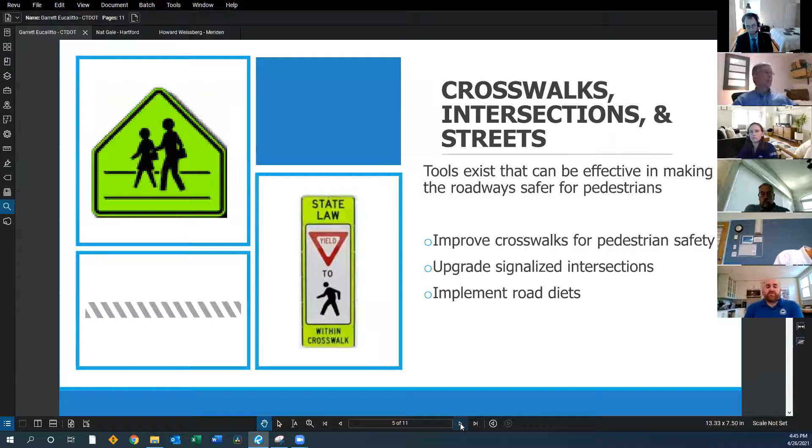It's really important for us to continue to do the outreach that we're doing through the Watch for Me CT campaign. We partner with the Connecticut Children's Medical Center to stand up this program. Connecticut's Highway Safety Office, run by Joe Cristalli in our Policy and Planning Bureau, is the lead on this initiative. Next slide.

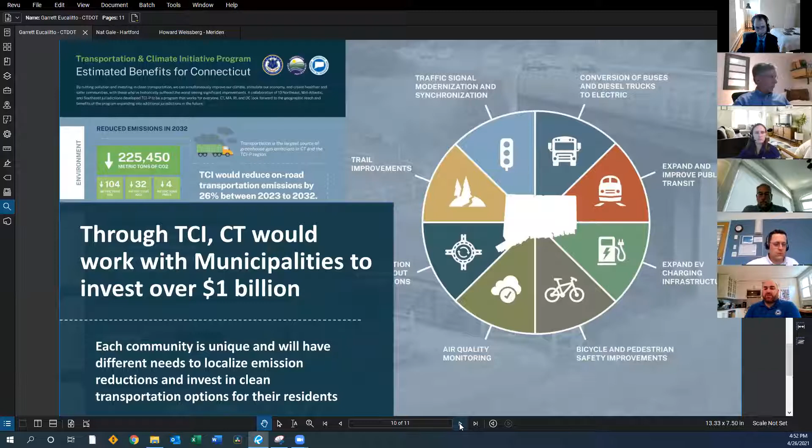So one of those pieces is through the Transportation and Climate Initiative. This program would reduce carbon emissions in the transportation sector by 26% over the next 10 years by auctioning off allowances for those carbon credits. And through the auction proceeds, Connecticut would generate $1 billion over a 10-year period to reinvest back into clean transportation. And this is a little piece of what I try to talk about to the public about how those proceeds could be invested. Talking about roundabouts and traffic signal modernization, bike and ped safety improvements. Each community is going to be different in what their needs are to help reduce emissions. And a lot of that is going to be on those that can help reduce idling, improve traffic flow, make it safer to walk and bike in their communities. Not to mention the opportunities for public transit as well.

And I think that should be it. So that is my presentation. Happy to take questions or wait till the end.

Thanks, Garrett. Yeah, this is Rich. And great presentation. A lot of interesting initiatives moving forward. A few things came to mind when you were talking. I heard about lowering speed limits in certain zones, I guess. So I'm wondering about enforcement, because as everybody knows, speed limits are not always followed, and you really need the enforcement element to make those as powerful as they can be.

Was there any discussion about how do we enforce the speed limits, especially if we're going to move to lower them further than where they are? There were, you know, it's a balance, I think, for a lot of the public policy folks, where we're having a reckoning in our country right now about the use of police force in traffic stops.

And there's discussions at the legislature about maybe moving some of the current primary offenses down to secondary offenses. So you can't be pulled over for covering your license plate as a primary offense, things like that. But speeding is something that continues to be, you need to have some form of enforcement.

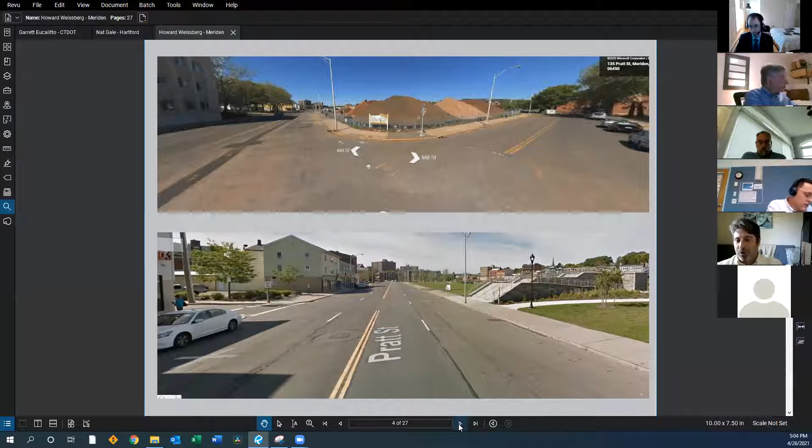So next slide. This is the redesigned Meriden Pratt Street Gateway. You can see that we have realigned the intersection of, it's technically Camp Street. We're actually in the process of renaming it Pratt the whole way through. But as you get closer, you can see that there's a landscaped median and you cannot go straight through. As we get to the intersection that was offset by 15 feet, you can now see that it is actually aligned correctly. There's a left turn pocket lane, there is a through lane, and we have a median buffer.

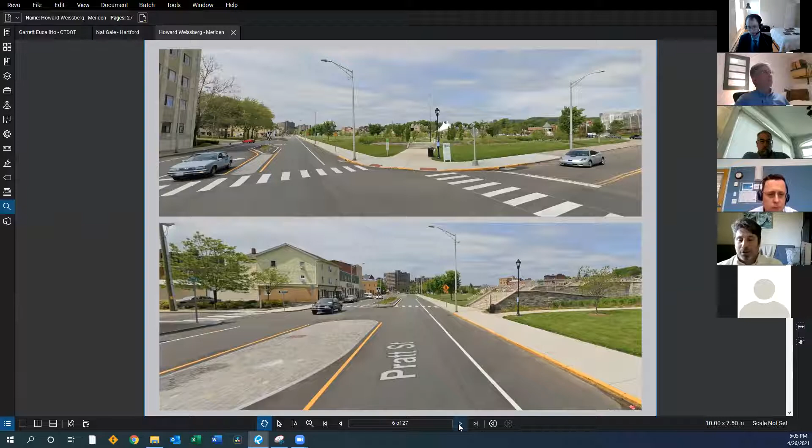Next slide. And now this is the approach to the Meriden Green, the award-winning Meriden Green flood control project. We have redeveloped the buildings on the right. The Meriden Mills Memorial Housing Complex is no longer there. That's actually going to be transformed into the next phase of the Meriden Green, adding another 4 acres to the park. And we have additional development to the right. That's some additional housing that has been developed. You can see that we have a left turn approach, a pocket lane into Mill Street. And if you go further down, that next slide, sorry, back up one more slide.

This is a flush median island. We developed flush islands when we realized that we had a lot of truck traffic that could not handle raised left turn islands. We went with flush granite paver blocks. This is right adjacent to the fire station. They had a lot of concerns during construction, but these paver blocks have worked fantastic in terms of changing the texture, changing the color. They're paver blocks. They're not going anywhere for the next 100 years. They're a very low maintenance item, and they've weathered fantastic. So next slide.

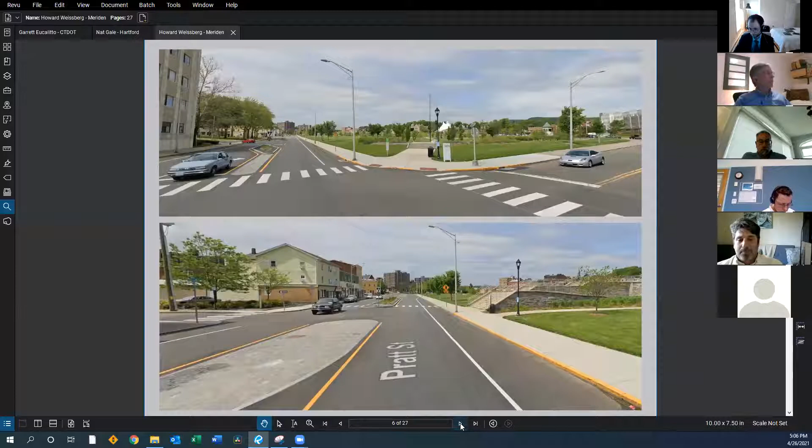So as I said, the goals of the Pratt Street Gateway project were to improve safety by reducing conflict, reduce speed through our traffic calming measures, including islands and textured pavements, and improving accessibility for peds through the use of those protected medians, which we'll go into a little further. And the landscaping enhancements that we put in were the creation of pocket parks, low-level plantings, minimizing maintenance, and I'll show these in greater detail too. We put a permeable border between the curbing and the plantings to keep the plantings contained and not growing all over and causing sight distance issues.

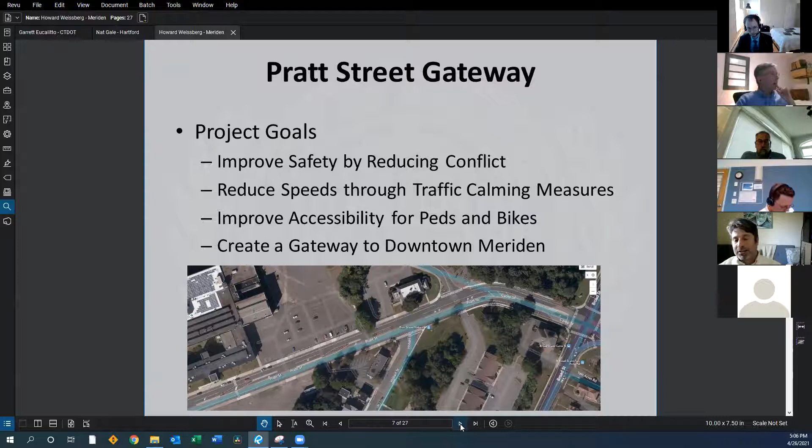Next slide. Project was funded through the LOTCIP program. We had a budget of $3.2 million. The project cost ended up being about 3.24. We're in our final audit right now, and we're going to be returning to the state about $48 that was left over in a PO that I somehow missed somewhere. Project was designed by BSC. VHB was our construction inspection and enforcement, and La Rosa Construction did our contracting.

One of the really neat things on this project is we also received a STIC grant through the State Transportation Innovation Council to use electronic project management and e-construction techniques on this. We used a program called Appia, which I'm still using today, and I'm encouraging every consultant that we have to utilize for construction project management. It makes project management very transparent. It makes daily reporting very easy. We could go in from anywhere and take a look at project photos, take a look at daily reports. Very, very good program there.

Next slide. So the project semifinal design started in 2016, was completed in 2018. Pretty much on time, worked out very seamlessly, had a number of construction issues that we were able to get resolved with a very strong project team. Next slide. Here's just a typical section of the full median and the left turn. The left turn is actually a flush median now. Like I said, during semifinal design, we made that change. And we had the travel lanes as 14-foot wide travel lanes to accommodate bicycles in the future.

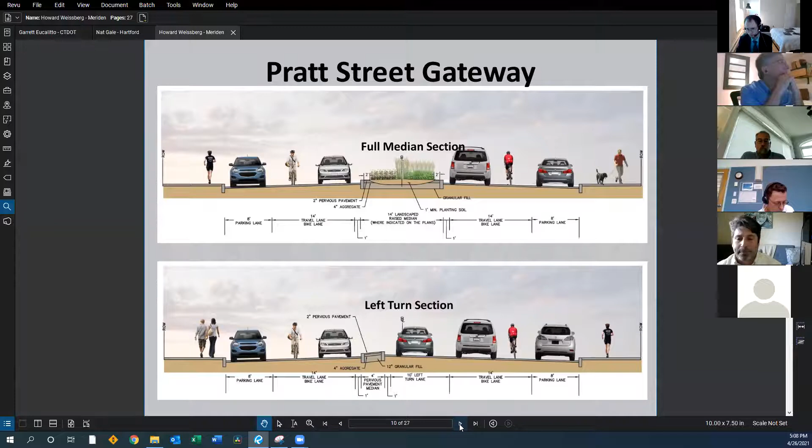And here's just some examples of what we did, the realignments. You can see the landscaping in this median over here. Getting people off the highway, this presents a very nice first image of downtown Meriden and directs them down the boulevard to downtown. Next slide.

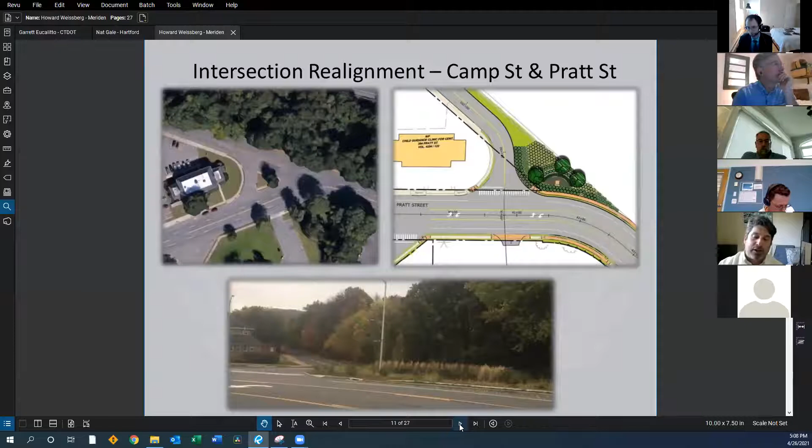Here's just some landscaping. It's great this time of year, now that everything's 3 to 4 years old, everything's really taking hold this time of year. We also created a little space for public art, should anybody get the desire.

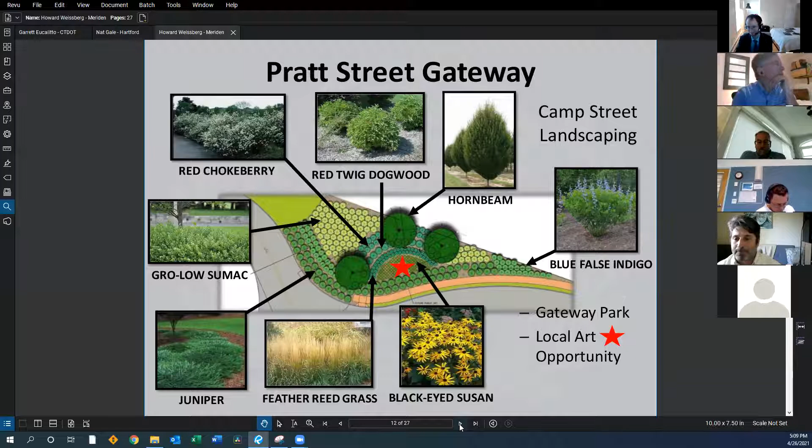Next slide. Here's an example of our landscape medians, and you can see the angled crosswalk. These are tremendously effective. We weren't quite sure how they were going to work when we put them in. We actually widened them to accommodate two wheelchairs passing. We realized that they weren't wide enough when we first did it, but you really have to face oncoming traffic. It prevents the pedestrian from blindly just crossing traffic without regard for what's coming.

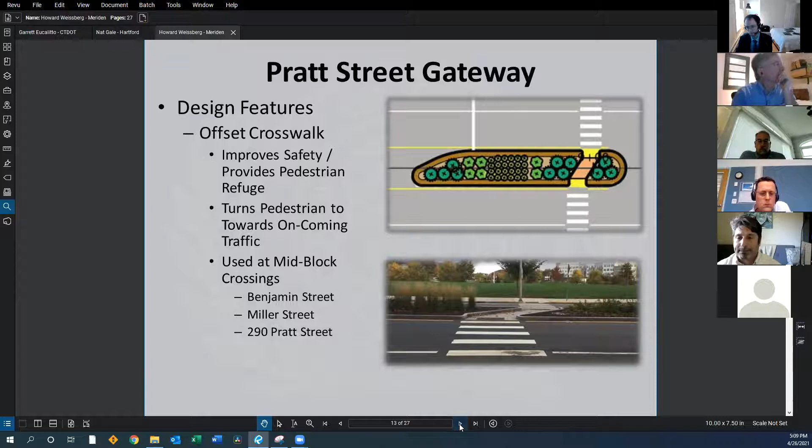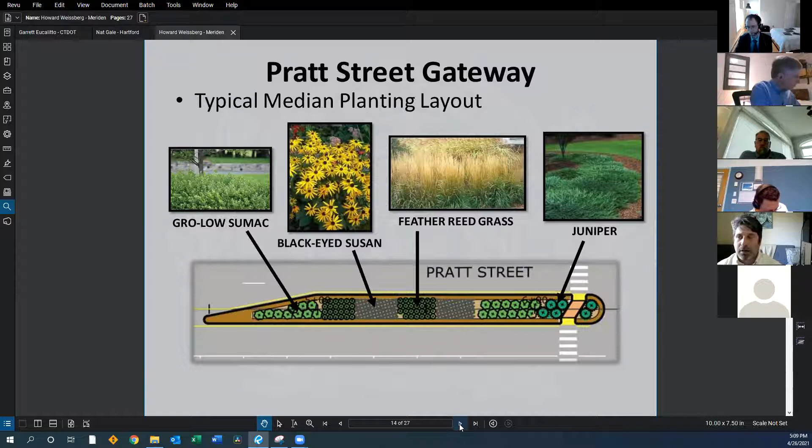And once again, here's just another example of our layout. We specifically tried to keep all the plantings adjacent to the intersections and conflict points low to increase visibility. Next slide. And that's just another example of that. And let's see, next slide.

We installed median alerts. These are little retro-reflective noses on top of our granite pavers, granite curbing. They work great at night. You can see them a mile away. And we did institute LED stop signs at our four-way stops along the corridor.

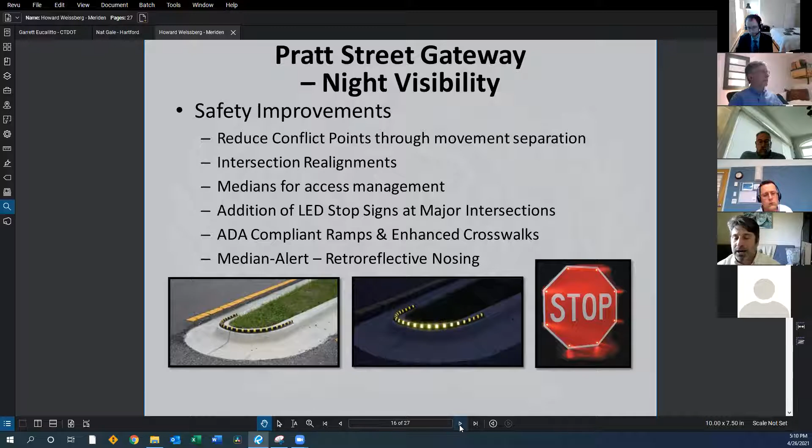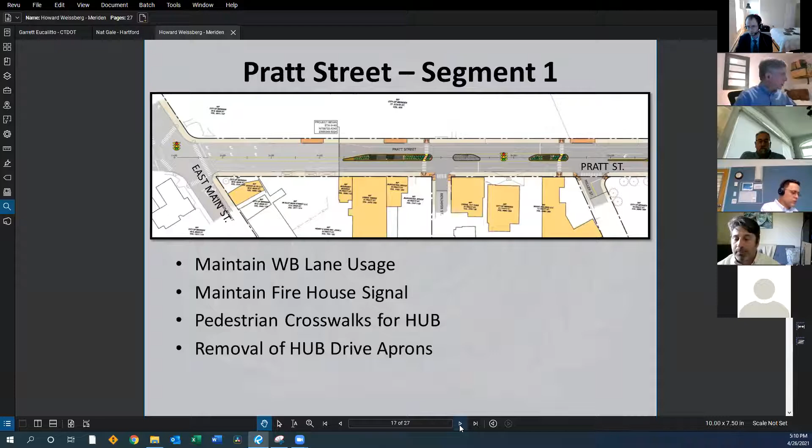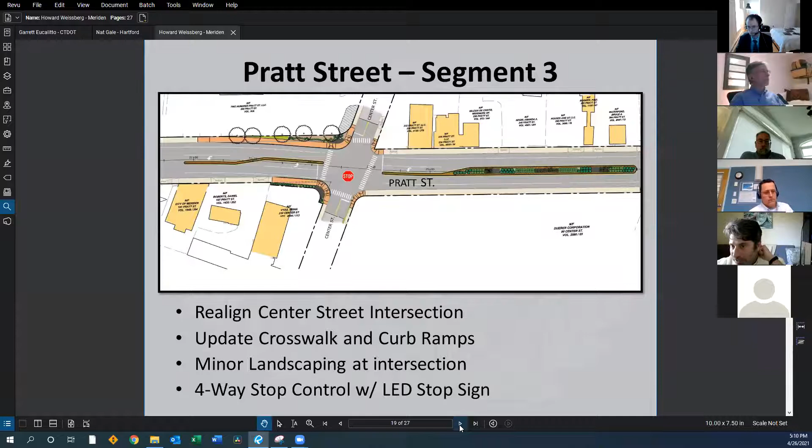Next slide. Once again, here's just a layout of our medians. We tried to have something consistent along the entire project length, just so that people were accustomed to seeing traffic coming. Next slide, and next slide. And you can see this is where we did our intersection realignment. All of these narrow areas are actually recessed flush granite paver blocks.

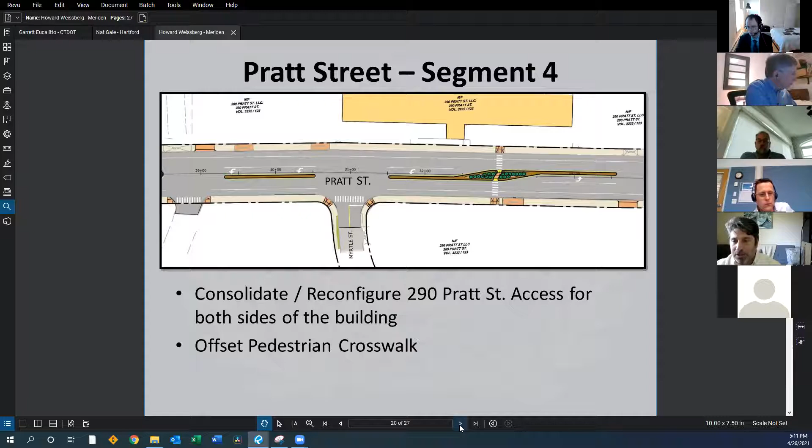And next slide. And you can see another crosswalk over here. This is to one of our big industrial commercial workspaces. They have a parking lot on the south side. So this is where we have our mid-block crossing.

Next slide. And this is just a typical of opening up before we get to our median areas. We had a two-way left turn lane in here. Just because of the way the turning movements were, we didn't feel it was appropriate to put in an island.

Next slide. And here's an example of this mid-block crossing with the offsets, the detectable warning strips the whole way through, and a very consistent, repeatable pattern of traffic calming. Okay, next slide. And next slide. And you can see how this continues all the way down.

We have a very large manufacturer on the left side. So that's why we went with these flush islands, so that they still had a sense of traffic calming without impacting their operation. Next slide.

And right here, you can see the median alert. You can see the granite paver block. And you can also see this is actually a band of FlexiPave, which is a permeable rubber porous product. I think it's a 1.5 foot band along the side. It provides a snow shelf. It provides our maintenance people an area to work when they are maintaining the landscaping, and it also prevents the landscaping from creeping over into the edge of the median. Okay.

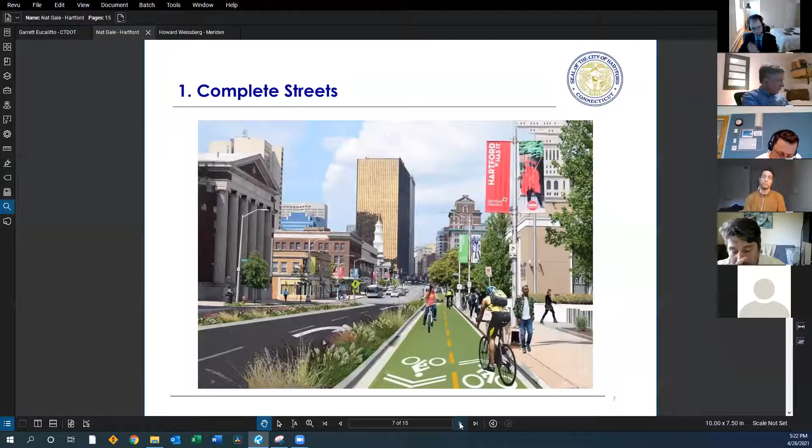22% of pedestrians dying in crashes. And so this allows us to, again, rethink our policy mindset, shifting from a reactive approach to traffic safety to a proactive approach to traffic safety. Vision Zero really starts with doing a data analysis of where those pedestrian deaths and serious injuries are happening, and then designing your projects around where you see that heat map of crashes.

And so you do want to take a 5-year data analysis, which is something that we're following the lead from the state, what Garrett talked about with his pedestrian safety plan. Take a 5-year data analysis and then focus your design efforts, your safety improvement efforts around where you see those pedestrian hotspots. And so this is something that we're investing in our next year capital improvement program budget.

We've put a $300,000 line item, right? It's a small beginning of a traffic calming and Vision Zero plan, where we're going to look at traffic diverters to calm traffic and slow speeds, raised crosswalks, and quick build pedestrian safety elements. So Complete Streets and Vision Zero are two big safety programs that we're investing in at the city to meet this moment that the pandemic has given us.

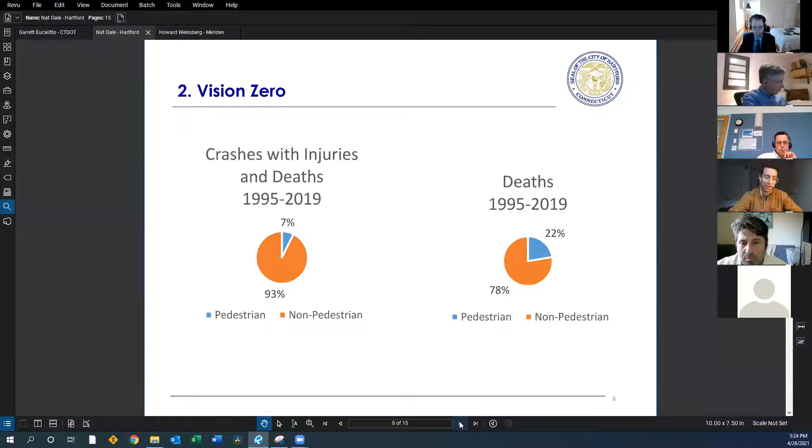Next slide. The second area where we're investing in to meet this moment is thinking about designing people streets, right? I think our industry for 100 years has designed vehicle streets. So how can we rethink and challenge ourselves to think differently and creatively about designing people streets? So again, I'll talk about 3 current initiatives underway. Next slide. So the first one is something that I'm really excited about.

It's an open streets program where we're modeling this off of Ciclovias, a program that started in Bogota, Colombia in the 70s, where the energy crisis met a public health crisis, and the city of Bogota started to take 10-15 miles of their streets and every Sunday make them vehicle free and turn them over to people walking, biking, scootering, rollerblading. And now in Bogota, Mexico City, and Guadalajara, that happens every Sunday like clockwork. And this movement has taken shape in the States as well.

And so we're looking in Hartford, is there a stretch of streets, our commercial corridors, where we can, one Sunday this fall, take 6-7 miles of streets and make them vehicle free, open them to people walking, people biking. It's an exciting traffic challenge, right? Because you'll have to have some crossing points to allow neighborhood traffic to get through. But it's something that I worked on successfully in the city of Los Angeles, and I'm thrilled to work on here in Hartford.

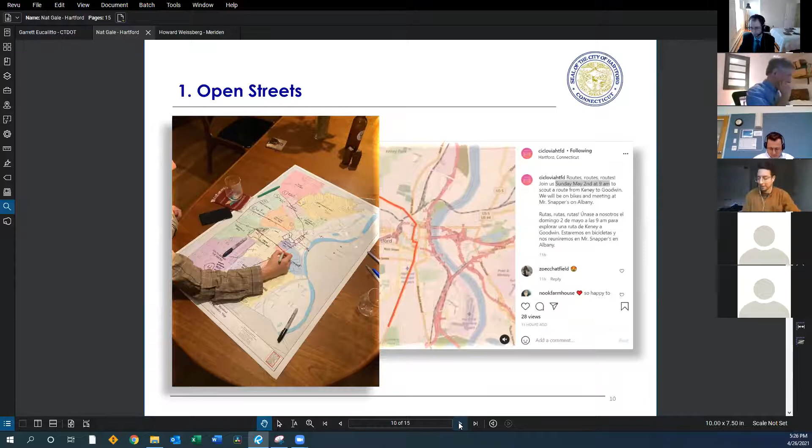Next, one thing that I've dedicated a career to in the transportation field is rethinking transportation as place. So we're really thrilled to have gotten a grant from the Hartford Foundation for Public Giving to invest in a community beautification program that looks at our bus shelters. And again, hats off to Garrett with some of the work that he's done at the state to allow art on some of the CT transit infrastructure.

And then next slide, I wanted to end with a little bit of a punchline. This is something that we adopted in our plan of conservation and development, a modal hierarchy that puts people walking at the top, right? Because when you get the policy right, that's going to change all of your design outcomes. And I wanted to give a shout out to the city of New Haven. This is a recent tweet from Doug, who's doing great things in New Haven, where they're looking at pedestrian signals at some key intersections in downtown New Haven.

And I think his tweet says it all. Like, can you believe we still have traffic signals where there aren't pedestrian heads, and that we still allow that as a profession? I think when you adopt a policy that puts a person walking at the top of your modal hierarchy, this type of outcome wouldn't happen anymore, right? And so I was excited to hear from Garrett that the governor is very interested in a traffic signal improvement program.

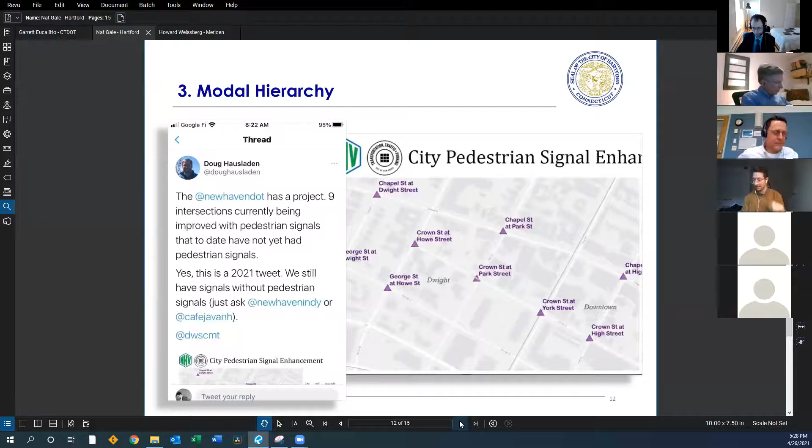That's something that we need in the city of Hartford, and I know other cities in the Connecticut region need as well. So just to wrap it up, next slide, we know that there's national support for this, right? Pete Buttigieg at the helm of USDOT, when he was running for president, campaigned on a national Vision Zero program. We know that he's looking at rewriting the MUTCD in a very progressive manner. His deputy, Polly Trottenberg, was at the head of New York DOT and saw a lot of exciting design changes at New York City DOT. So we know that there's national support.

Next slide. And locally in Hartford, we've got great support from our mayor, Luke Bronin.

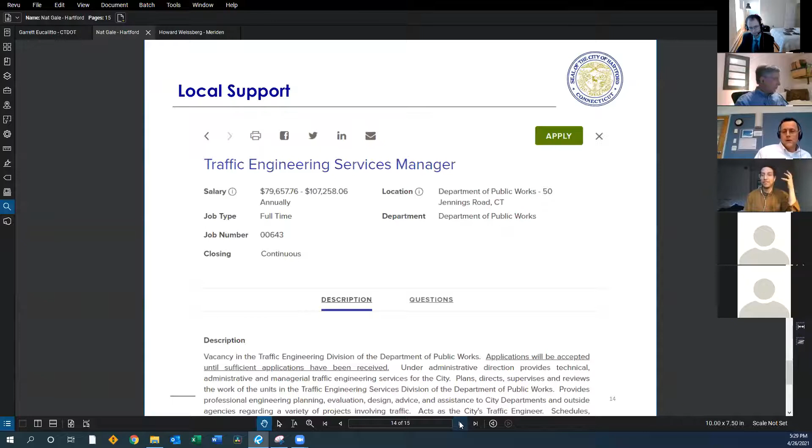motivates me every day. And so, again, I was thrilled to be given the opportunity to talk a little bit about what we're up to here in Hartford. And I'm really looking forward to working with all of you here. So that's it. Thanks for the opportunity. And looking forward to a lively discussion.

Thank you, Nat. Great presentation. And you mentioned Albany Avenue, and Connecticut DOT recently completed a pretty impressive streetscape pedestrian safety project out there. What has been the community's reaction? I don't know if you were here for the planning of that and the design of it, but what's the word from the community?

So I certainly followed it from afar. I just got back to Hartford last November. I would say what I have heard from the community is, when can we do more of Albany Avenue? Because it's been transformational for the area where that project went in. At night, the lighting is just so much better. It's easier to cross the street. The businesses have appreciated it. There are little things that we still got to get right, like putting more trash cans out, right? I think that's some of the natural evolutions of projects. But it's been a great project there.